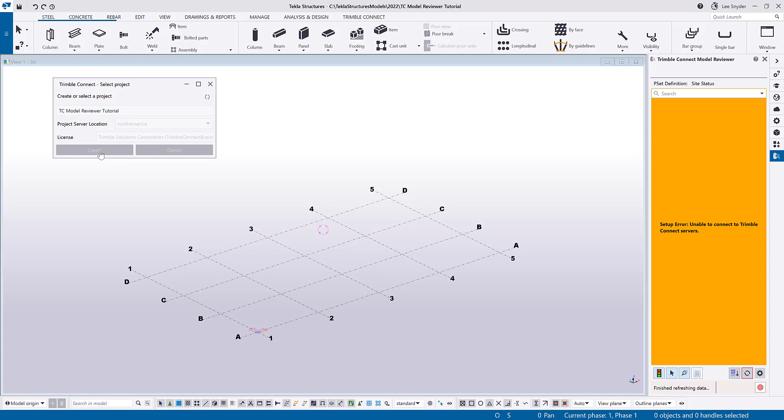Since this is brand new, I'll just go ahead and click on Create. That's going to create the project there and then link my model to it so that I can begin a collaboration between those. If you had an existing model already created, that's excellent.

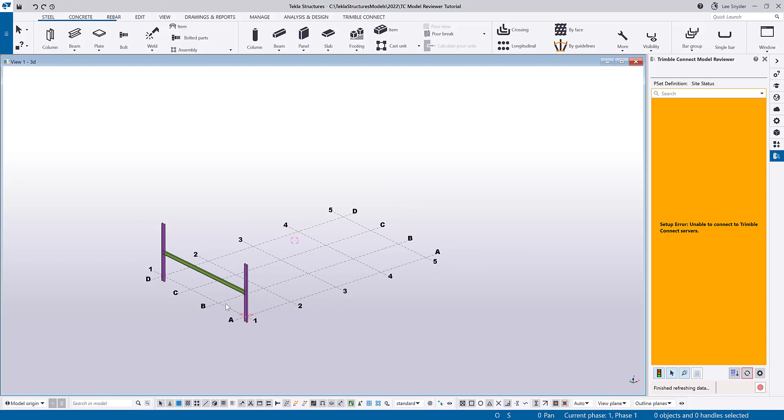I'm just going to put in 2 columns and a beam and add some simple connections, create some drawings, so that we can simulate a workflow. All of you know how to create models and stuff like that, so I'm not going to spend a lot of time explaining what I'm doing.

I'll just go ahead and add some connections so that the drawings have a little bit of detail on them. So there's the base plate connection, and then let's just go in and quickly add a shear plate connection from that column to beam and then from that column to beam.

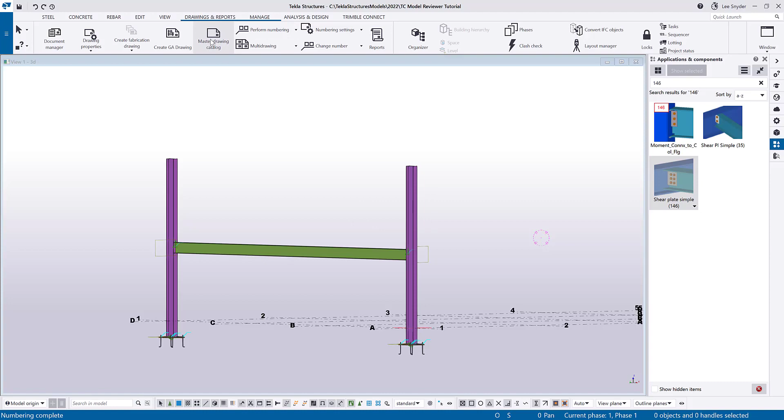What I'll do is come in and number my model, so I can run my numbering. And then real quickly, I'll just create some drawings. I'll open up the master drawing catalog, and then use this first option to create drawings for all parts. That will create some drawings that we can utilize later in the tutorial. I'll close that for now.

The next thing I need to do is share the model into Trimble Connect. There's easy ways to do that. What I'm going to do is just use this command from the ribbon. However, if you wanted to, you could create an IFC file and upload that manually into Trimble Connect, or you can use the Trimble connector under the models button there to upload that information.

Before I go into Trimble Connect, one last thing I'll do is upload those shop drawings into Trimble Connect and link them to the object so that they can be utilized by the people that I'm collaborating with.

If I come to the Applications and Components catalog, I can search for this extension called Linking Documents to Trimble Connect. If you're not familiar with this extension, I'll provide a link below that goes through a tutorial of how this works. This is another extension that can be installed that will PDF your drawings, upload them into Trimble Connect, and allow those people to use them, and it'll be utilized in this workflow as well.

I'm just going to navigate to where the file is. Right now, all I'm concerned about are the assembly drawings. I didn't edit the drawings or anything like that. I'm just going to upload them as is, and link them as PDFs. I'll go ahead and run this. Like I said, what this will do is print those drawings, upload them into Trimble Connect, link them to those objects, those assemblies in the project, and then they can be utilized in Trimble Connect, and I'll show you how those come into play in the TC Model Reviewer as well.

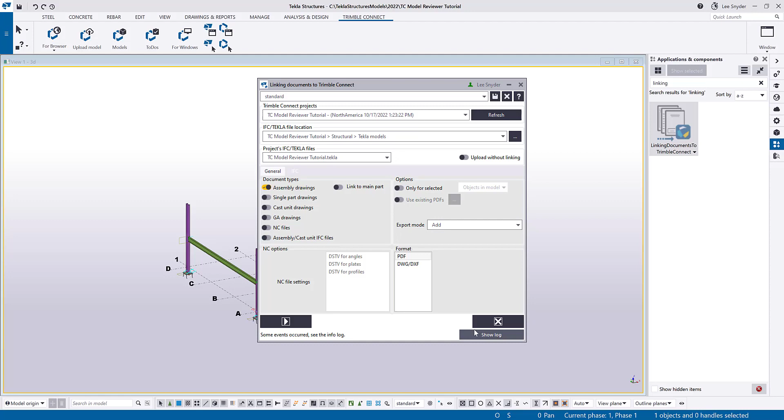Now that that's complete, let's go ahead and open up Trimble Connect so that we can set up our collaboration with the property sets. I'll launch this here. It will load in the model, and just to quickly verify, I'll click on one of these assemblies and you can see the linking icon, so I know that my drawing has been uploaded there.

So with this extension that we've created, the primary way that we want to collaborate is utilizing the property sets. To begin with that, I'm going to come over here into the Project Explorer, and you can see there's the property set libraries.

Since this is a brand new project, this will be blank, so I can begin to set up a brand new library. If you're a project admin, you can set up libraries that can be utilized on all of your projects, both new and existing. I've created a separate video that I'll link to at the bottom of this video, explaining how to do that. For this example, I'm just going to show how to create these property set libraries within this project that can only be utilized in this project. But if you want to utilize other libraries throughout new or existing projects, you can set those up as the project admin.

So to begin, I'll go ahead and click on New Library, and then I can come give this a name. I'm just going to call this Workflows, and then I'll save that.

Then I can begin adding property sets by clicking the plus button down here, and give this a name, so I can just call this Review Workflow. I can also give it a description if I want, and you can see there's a way to manage the access controls. I've created a separate video about how to manage the access control, so I won't go into too much depth on that here. So we'll just give this a name of Review Workflow, and then I can come add my properties.

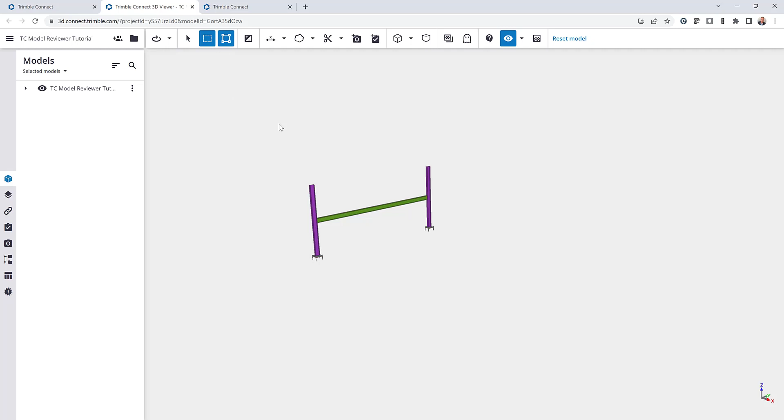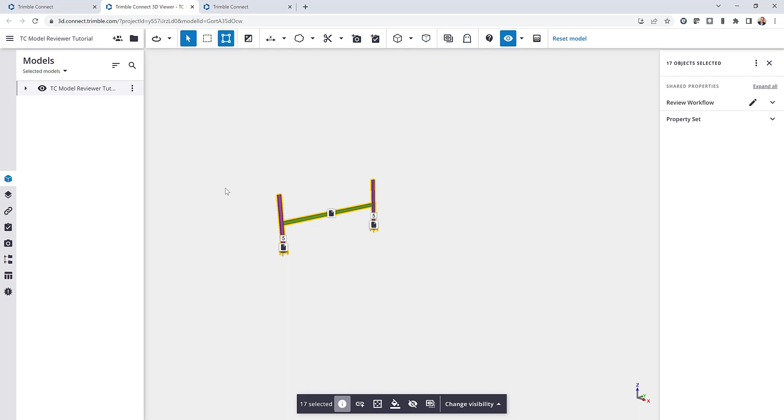Those property sets need to be enabled on each of the parts or the assemblies in the model, so I'm going to do this all at once by selecting the entire model. Then I'll come up here to the three dots and say Add Properties, and you can see here that I have my review workflow that I've created with my three options. I'm just going to enable all of those on each of the objects, click on Done. Now when I click on each individual assembly, I have the review workflow with the edit icon that I can come in and begin collaborating.

So to see this edit icon, you do need a Trimble Connect Business Premium license. If you have a business license, you'll be able to view information that has been added, but if you want to add or modify information, you would need a business premium license.

So for this, I'm just going to give this an approved as noted status, and then I'll say see drawing for comments, and then I can timestamp this with today's date. So that one is set up there, and then on this beam, I'll go ahead and add my status. I won't add any comments, I'll just set this to be approved.

And then just for the sake of different colors, I'll do the same for this one and just say revise and resubmit. So this is the workflow.

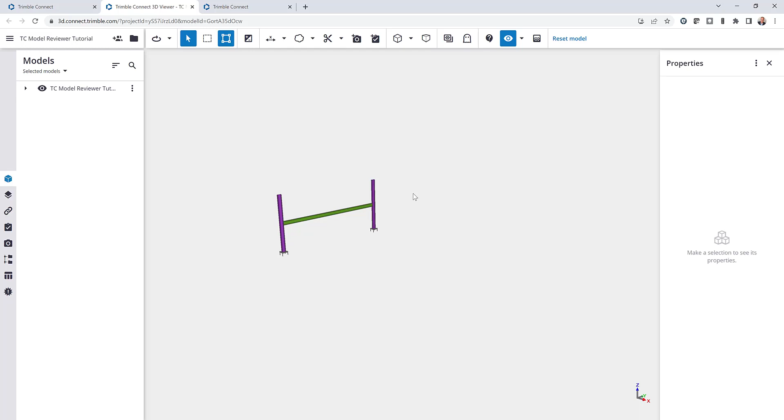You create the property sets, and then someone with a business premium license can come in and add that information. It can be viewed by clicking on these parts or assemblies individually and viewing it in the list. But if you wanted to view it in a quicker way, there's a tool added to Trimble Connect called the Organizer that allows you to easily view this information.

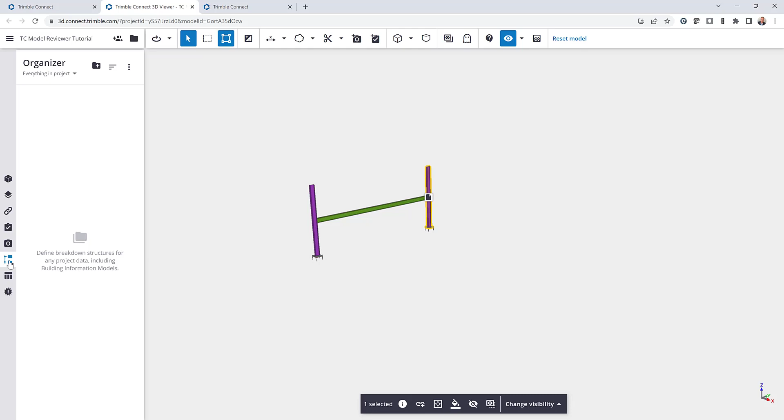So I'm going to create a new rule-based group. The model I want to review is this tutorial I've uploaded, and I want to look at the assemblies, and then the property I want to colorize by or group by is this review status.

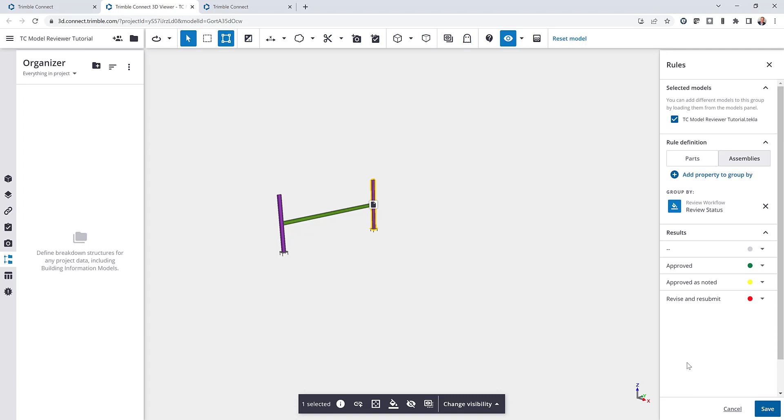So I can find that there, and it's helpful for me to have the colors, so I'll enable the colors, and then I can give these colors specific meanings. I can say that approved is green, approved as noted will be yellow, and revise and resubmit I'll make red. Once I'm satisfied with that, I'll click on save.

That will create the rule, and you can see it's colorized my model there of approved, approved as noted, and revise and resubmit. Then I can expand this and interact with it as needed and toggle the colors on or off.

So now that those property sets have been added in Trimble Connect, I want to come view those in Tekla Structures, and that's why we've created this extension.

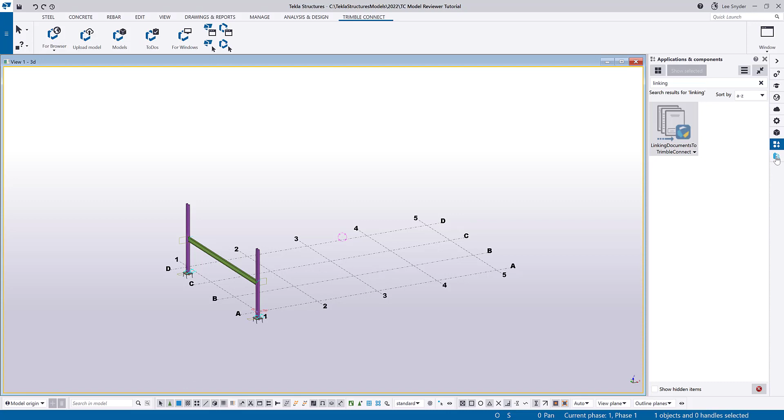So if I come back into Tekla Structures and to this tool here, I'll come down and refresh this tool. This will establish the connection to the Trimble Connect project we already have set up. Once that's refreshed, I'll get a different error saying no project definitions have been found, and you can see this gear icon is highlighted in red.

So those are prompts I can just follow. I'll click on that and it'll tell me that for the property name, I need to choose and define which one I want to look at. If I hit the dropdown, you can see this property name that we created as the property set library, so I'll click on review status, and it will automatically load in those values I've defined.

And then I can set up the colors just like we did already. I'll go ahead and say that this will be green, and let's set this one up as yellow, and the last one we'll set up as red. We'll save this so we don't have to do this each time.

Now, if you remember, we ran the linking documents to Trimble Connect extension. So if we want to view any of the links associated to the model, that's where I'll come in and choose the model that those documents have been linked to. I'll define that there.

I have an option here to show the property history, so I'll leave that on and show you that later. Then the default state and default color is how you want to colorize things that don't have a property set assigned to them. If you hit the dropdown, you can choose whichever options are pertinent to you.

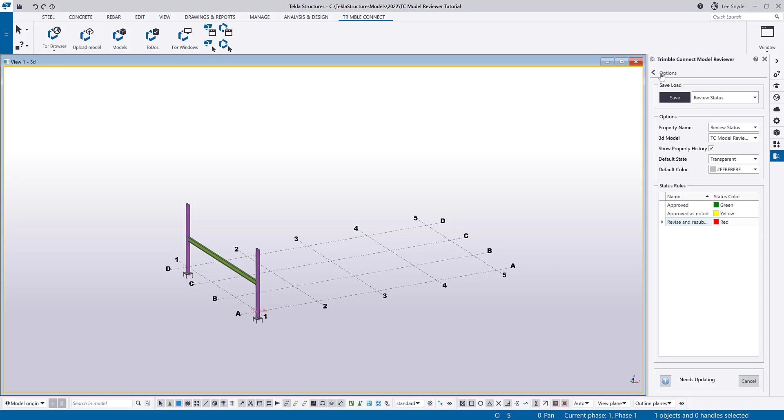Then I'll come up here and save this away, and I'll just call this review status so I don't have to set up all this information each time. I'll click on save, and then go back up here and click on the options. That will take me back to the main screen.

This will run a refresh because my model is small, it's already locked and loaded. Then you can see that everything's colorized based upon the categories we've defined and organized based upon the dropdown choice. That's why it's critical that each of your libraries have at least one dropdown choice, because that's how they'll be organized here.

So to use this tool, there are several options. Down here at the bottom, we have this colorize model option, so I can toggle that on or off if I want to see the colors. I also have the option to select these objects in the model when I click on them in the tree, and the option to zoom to selected.

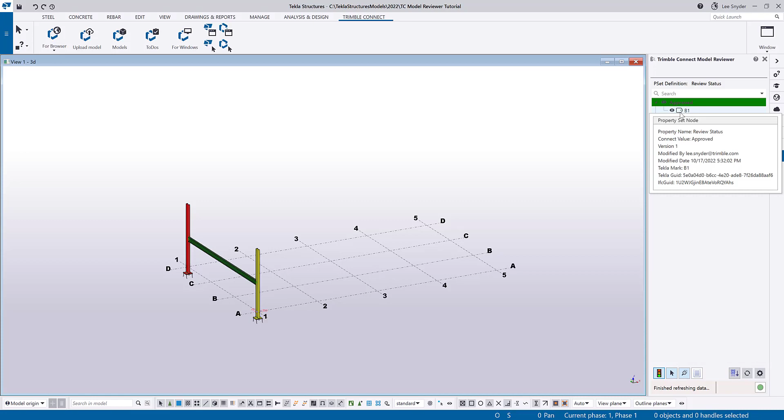So the way that works, if I click on B1 or C1 or C2, it will highlight those and zoom me into those locations, or I can modify those options if needed. We also have right-click options, so if you want to collapse any of these nodes, expand the nodes, or change everything from hidden or visible, you can do that.

Or if you want to do the visibility options individually, you can just click on the eyeball, and that will then hide the assembly, or you can hide the entire category. Since we only have one in each of those, it's a little bit limited in this example, but I think the point gets across.

The reverse also works for our selections. So if you have something selected in the model, I'm going to go ahead and select assemblies, and you want to find where it is in the tree list. If it's a really long list, you can click on this button here, and it will highlight that here with this blue bar. You can see that that is a C2 now.

When you come over and hover over these, you can see additional information about these parts. So if I hover over C1, you can see there that because I added a review comment or review date, those additional things that were added in the library can be visible. But again, it's categorized based upon that drop-down choice. So I can see that there's a review comment and to see drawing. And so that's something that I may want to interact with.

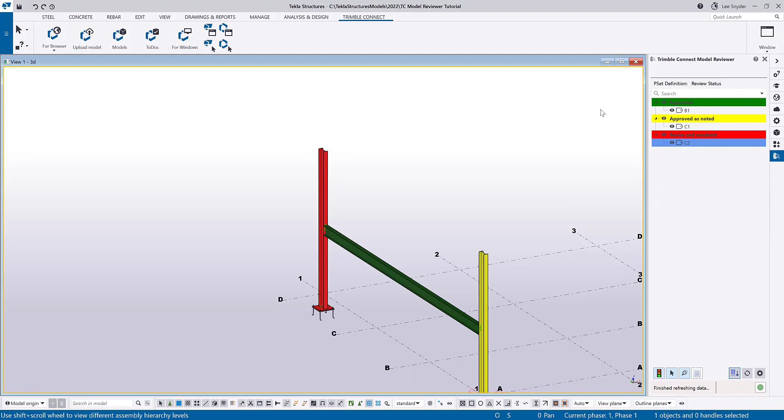And so to do that, if you come in and open up the property view panel here, we have various tabs that will show you information. The first one that I have this set to already is to show the links.

So if I wanted to see the drawing or that document that we created, you can see that it's listed here as that PDF, and I can click on this icon and it will launch that PDF opened in the 2D viewer within Trimble Connect, and then I can then see what comments were there.

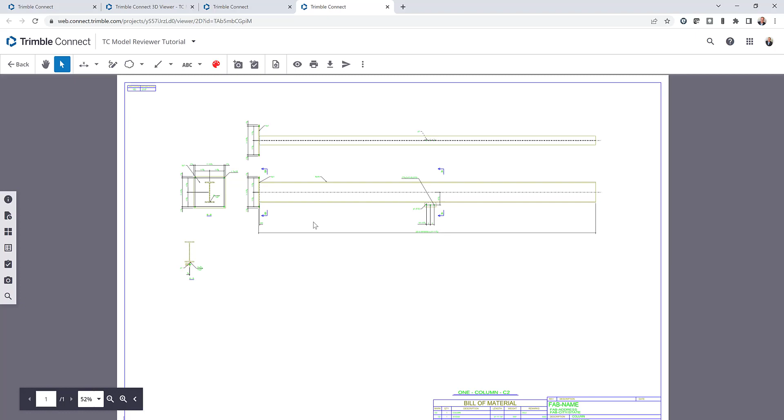There's some basic markup tools here, or you can download it and mark it up in your preferred PDF editor, and then re-upload it and maintain the version of that document so that you have a running history there. So quite a powerful tool to be able to interact directly between Trimble Connect and Tekla Structures.

We also have a history tab. I'll show you how that works in our workflow, and then there's some other property information that you want.

So to collaborate, we've gone through and we've done the initial collaboration. Let's go back into Trimble Connect, and I will close this, and let's go back into the model. And let's say that I reviewed the drawing, I reviewed this assembly.

I'm now satisfied with the changes that have been made, and I need to update the status here within Trimble Connect. So for this, I'll come back to the edit icon. I'll go ahead and mark this to be approved, and I'll click save.

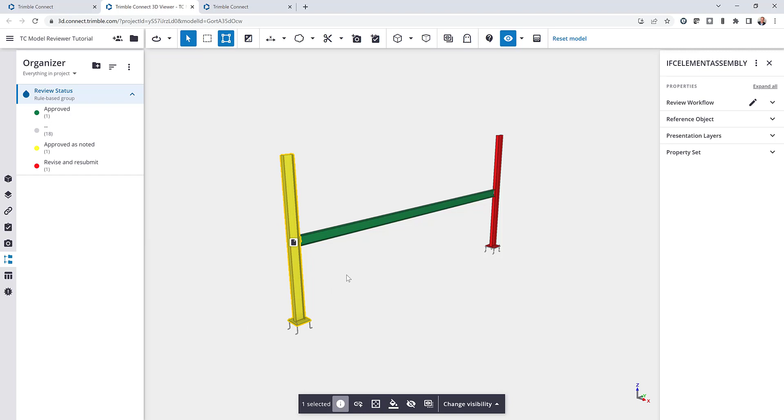Now that information is saved, but you'll notice that my colorization hasn't updated yet. So to do that, what I'll do is come over to my organizer group and just click on update group. And now you can see that it's colorized the column and the beam both to be approved.

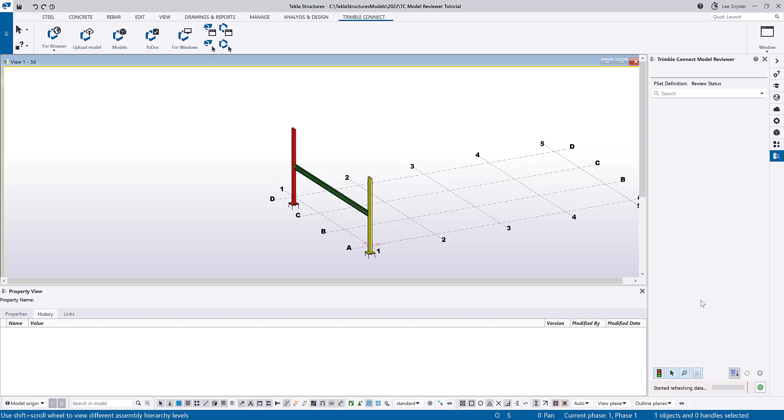So same idea back in Tekla Structures. If I wanted to update this, if you launch the tool initially, it will do a refresh. If you have the tool open and want to pull in the information, you can come down here and just manually bump it, and this will go through. It will read that information from the Trimble Connect property set service and then update your model accordingly.

So now you can see that my column is set to green, as well as my beam here. So if I wanted to follow the history on this piece, I can go ahead and identify it in the tree view. Once it's selected in the tree view, now you can see that I have the history. So this says version 1. It was set to approved as noted with the comment See Drawing and then the timestamp there.

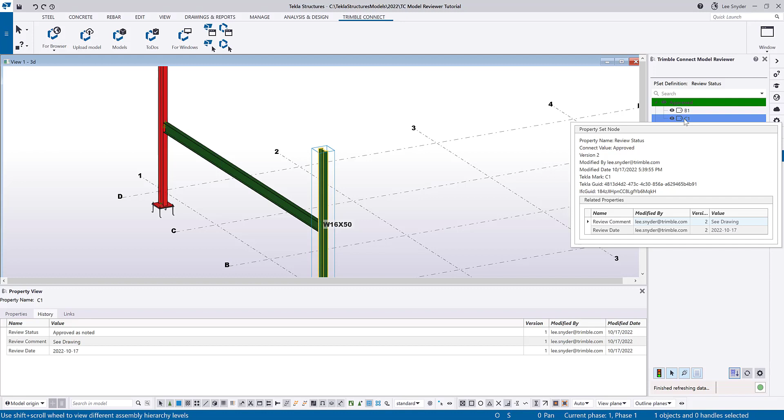If I come hover over the card, I can see that the current status is set to approved, and it says version 2. So I can go to the history and view all of the previous versions that were there if I needed a digital paper trail of sorts to follow that all the way through.

So there's a tutorial from start to finish of how to set this up initially and how the collaboration process between Trimble Connect and Tekla Structures can take place utilizing this extension.